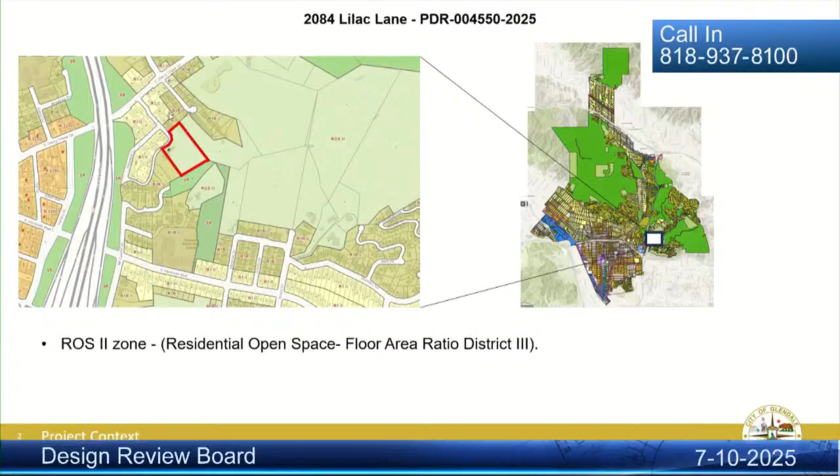I'll begin by giving a little context for the subject property. It's located south of Chevy Chase Drive, just east of the Glendale Freeway in the Chevy Chase neighborhood. Lilac Lane is a small curving street, and the subject property is quite large—almost 2.8 acres in size, with the vast majority of the site being vegetated, undeveloped, hillside sloped area, with a small flat pad area where the existing 1,300 square foot one-story home is located.

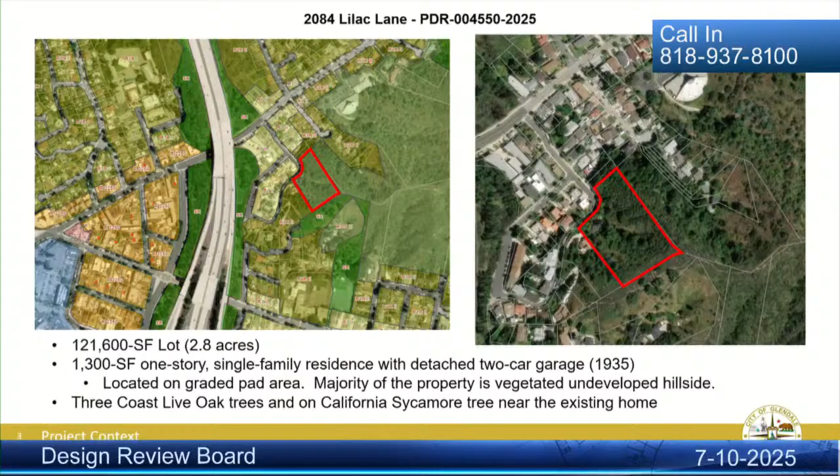The proposed project doesn't propose any new grading, essentially keeping the project to the existing pad area. In the near vicinity of the development there are 3 coast live oak trees and 2 California sycamore trees, which I'll describe a bit later in the report.

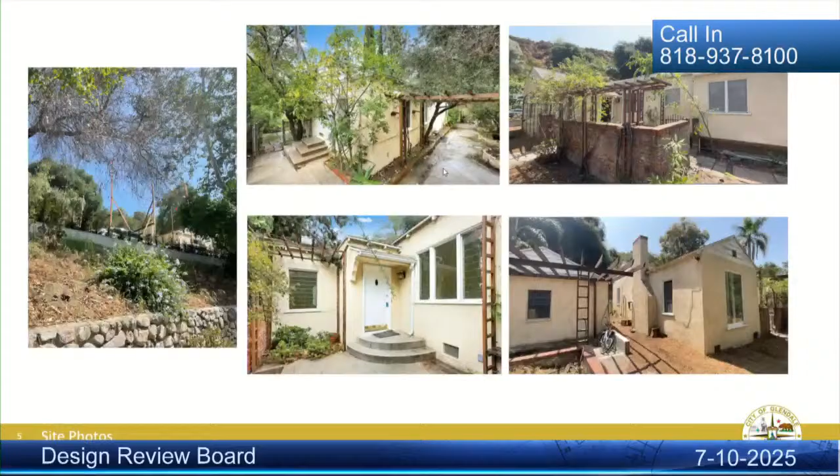These photos show some of the existing conditions: a simple, minimal, traditional home set up above Lilac Lane on this graded flat pad, with a considerable slope between the street where this photo was taken from. Here you can see the story pole installation that shows the outline of the second floor, for the board, staff, and the community's reference.

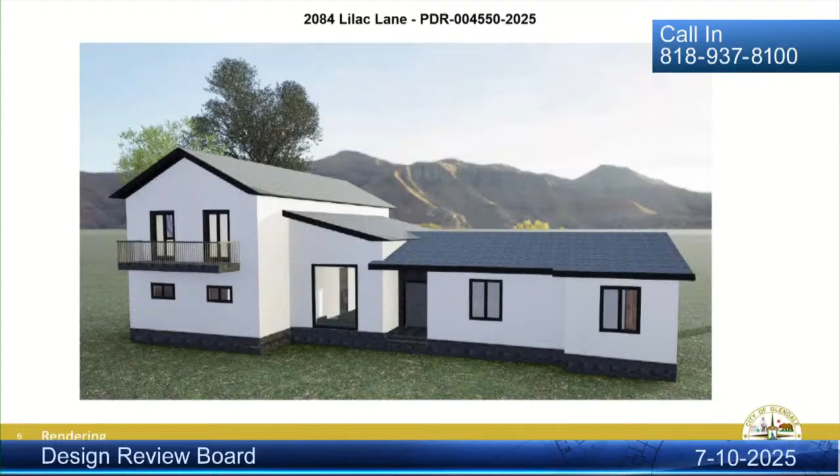Here's the rendering of the proposed project. You can see that the 2-story portion is set towards the east of the site, away from the nearest neighbor to the west on Lilac Lane, and generally maintains pretty simple traditional forms, with 2 open gables set perpendicular to one another and a shed roof area that provides a transition between the first floor and the second floor of the addition.

On the first floor, we have a recessed entry providing access to the living and kitchen area, 2 bedrooms, and a small library on the right-hand side once you enter—this is sort of an enlarged footprint of the existing 1-story home. On the east, left-hand side, we have the 2-car garage, 462 square feet, and a large playroom. Above it, a large office and a 3rd bedroom on the second floor with 2 balconies facing north and south.

Looking at the west elevation, the closest neighbor would be behind you if you were looking at the project from this vantage point. You can see how the project steps up from the 1-story portion to the 2-story portion as you move from west to east. And here you can see the garage and that 2-story portion of the home.

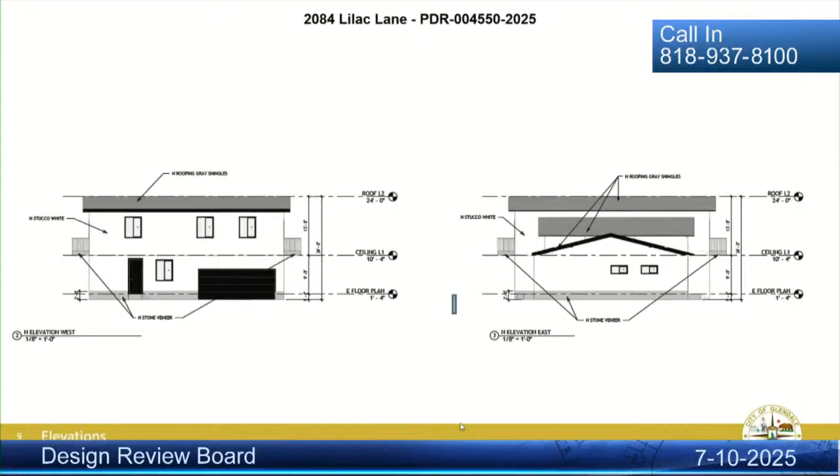As I noted, there are 5 protected indigenous trees located on the subject site. An indigenous tree report was prepared by the applicant and submitted for review by Public Works Urban Forestry, who concurred with the conclusions of the arborist report.

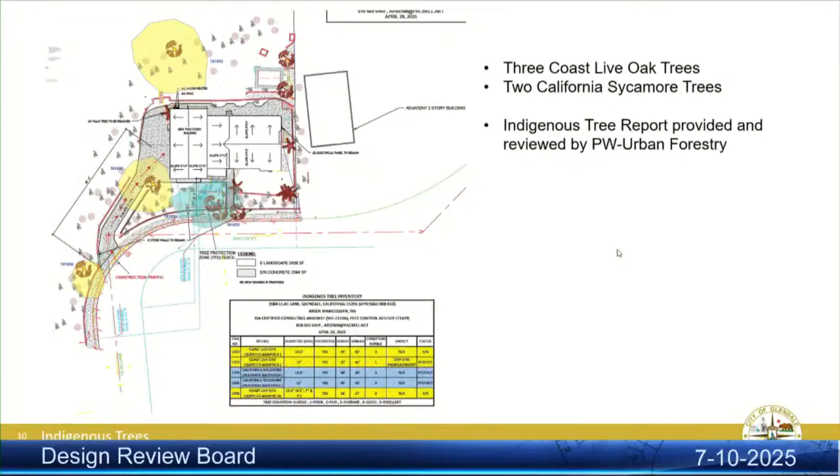I also wanted to point out a discrepancy between what was shown on the plans and the current conditions in the field. The subject site has low stone walls that are really in keeping with the rustic hillside character of the area, and they were shown as proposed to remain on the site plan. I think due to some sliding and some damage—and I can let the applicant speak to this—they increased the height of the wall and put stucco over it.

This doesn't necessarily comply with the zoning code nor with the design guidelines for hillside development, which look for a more natural look for retaining walls. So there's a condition of approval for the applicant to work with staff to bring that into compliance as this project moves forward, should it get approval from the design review board tonight.

Again, a relatively straightforward project. Staff spoke to the findings with respect to site planning, mass and scale, and design and detailing in the staff report. We recommend the following conditions of approval: to reduce the stucco wall adjacent to the driveway and restore it to its original condition, exposing the stone and maintaining its natural appearance. The driveway, which is shown to remain, based on staff's observation in the field, is damaged.

As a new home, we would like to see a new driveway with decorative materials appropriate to the design of the overall residence, and offer that as a condition of approval for the board's consideration. As you saw in the elevations and renderings, the home is a straightforward, simple design consistent with the style, but staff would encourage the applicant to consider a greater variety of exterior materials that could add interest to the home, and perhaps use an off-white or eggshell white in lieu of the crystal white proposed for the exterior color.

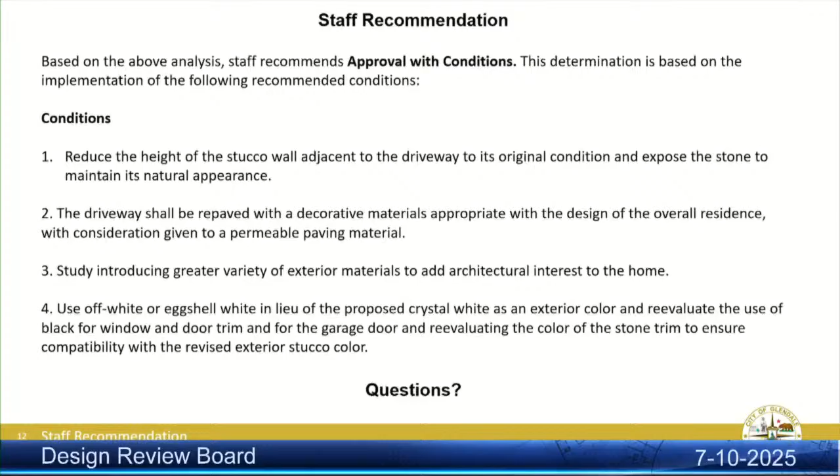With that being said, staff is supportive of the project with a recommendation of approval. I'd be happy to answer any questions of the board. The applicant and property owner are here. I did not receive any comment based on the public notice or the posting of the site, which was posted as required in the Glendale Municipal Code. That concludes my presentation.

Be happy to entertain any questions from the board. Thank you. The arborist report—did it require replacement of the oak tree, or just removal of the one in bad condition? Because the project plans called for maintenance of that tree, I'm not sure it spoke to that.

Let me take a closer look as the conversation goes on, and I'll see specifically what the tree report says in terms of the removal, and revisit Public Works comments to see if they would require a replacement of that tree that was in poor health.

Okay, I'll follow up with the applicant, but are you aware that they're going to be removing the entire roof as part of this and doing a new roof on everything? Yes, that's correct. The applicant did provide demolition calculations, which, when combining the exterior roof and wall areas, exceeded 50%, again requiring this project to be considered as a new home and come before the design review board.

Any other questions? Board Member Welsh, I do have the interdepartment comments and the Urban Forester's comments on my screen right now. They acknowledge that if that tree were to be removed, they did not require a replacement or replacement ratio. However, they did state that an indigenous tree ordinance permit would be required, which would include a protection plan for the existing trees on site or any work near it. So there were no replacement ratios or replacements, to answer your question.

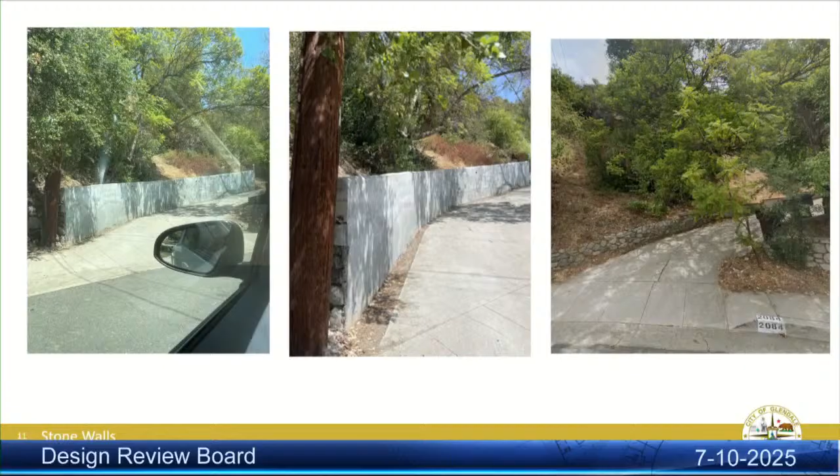So we're gonna bring it back to not the original look, because the original look was crumbling down. Those stones, I don't think they even have mortar, it's just stuck on top of each other, and they were falling down on the cars. That's why he decided to go ahead and reinforce it a little. But we can propose something nice, some nice wall, more natural looking, maybe with stamped concrete on top of it.

Yeah, concrete. Okay, sorry, just one more question. Do you mind bringing up the 3D image of the house?

I was curious, in terms of the roof forms, if that central volume, had you considered extending the roof all the way to the other roof rather than terminating it there and just having that be the roof of the entryway? I was just curious if you explored that option. We have not, but we could. I think if we do that, it's gonna be very bulky because we already have such a big volume for 2 stories, and next to it, it's a 1 story. Just adding to that 2 story is gonna create a bigger volume, and as far as the balance, it's gonna be off balanced to me personally.

And did you consider the lower roof form where the fascia overlaps the middle volume? Did you consider terminating it at that volume? Could be, yeah, could be. Doesn't... could be.

As a follow-up, did you consider just having that lower roof form continue all the way to meet the second-story volume, as opposed to this intermediate one? That's kind of a... because the upper roof is a gable, the lower is a gable, the other one is like a shed, so they're not necessarily in full alignment. And it also seemed like they have different slopes.

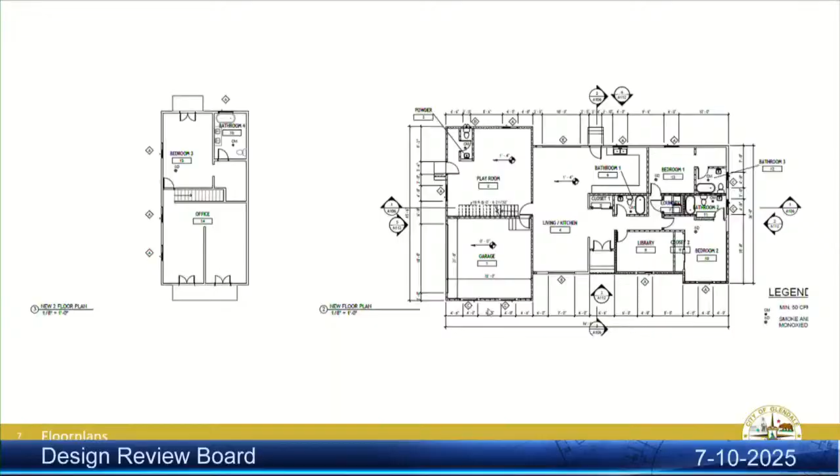Do they have different slopes? It should be the same slope, if I remember correctly. So the middle part is the living room, and the owner wants to have a higher ceiling in the living room. That's why we elevated it to give them that space. Because it's a smaller, narrower room, but they would have a higher ceiling. That was the idea behind it.

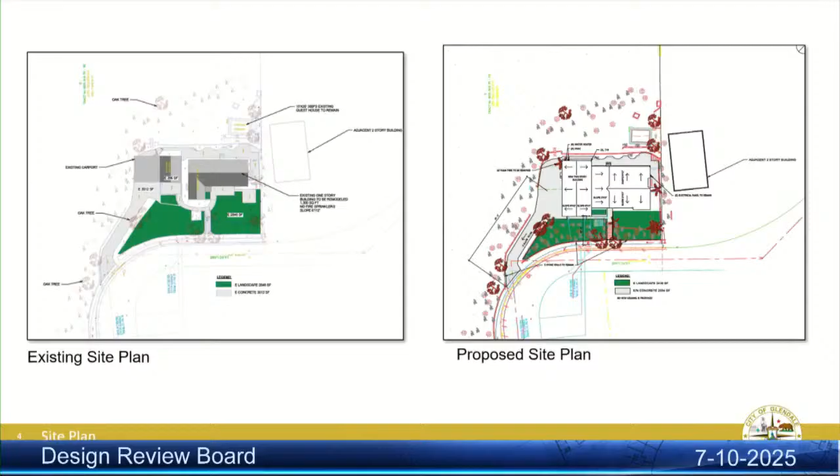You can see that on sheet A102, it calls out the roof pitches, the site plan, roof plan. So I saw that on A102, but that lists a 6-12. But if you reference page A105, it shows a 6-12 slope on the second story, 3-12 on the others, so they were not consistent on this page A102. So I'm just curious, are they the same or are they different on the different roof forms?

I have to double check that. I don't remember, tell us what your thinking is. The thinking is that it should be the same slope everywhere. Same slope, same everywhere, okay. Yes, that's the idea.

Mr. Halajian? Thank you, Mr. Chair. I was just curious about the driveway wall. Do you have any ideas, are you thinking more natural? I understand the cobblestones were falling into the driveway and they're not retaining, but are you considering doing like a split face CMU block wall? What are your ideas to comply with the hillside guidelines?

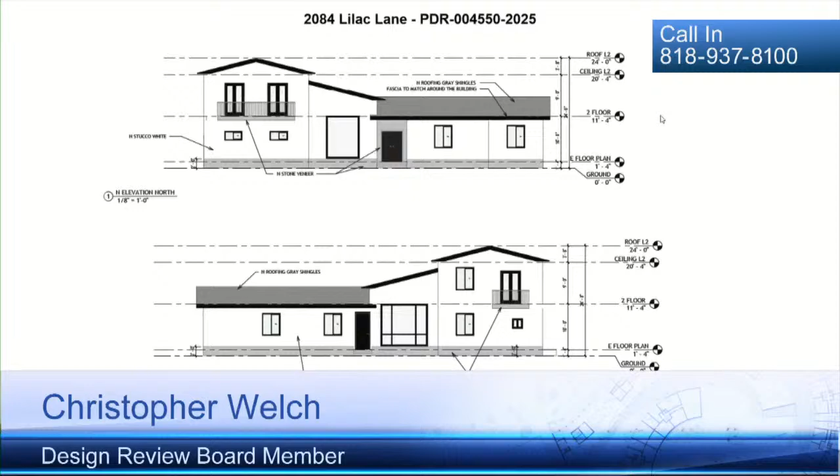Would the board agree that maybe the head of the windows and the door should share the same datum, so there's some consistency, and we can work with staff and the applicant on window sizes and fenestration pattern? I know there are some volumes where, for example, on the new south elevation, which would be at the bottom of the screen, the head of the windows don't really match up, and traditionally the head of the windows share that same datum line.

So there's some consistency as your eye pans across the elevation. We can work with that. And it could be that once they study the materials, that can be a solution as well—so the top of the material might align at that level, the level of the larger window. I think those could go hand in hand. But for me, I can appreciate wanting a tall window for the interior in a large volume.

So I concur. I just think that from a massing perspective, how it dominates the facade was a little much. But again, I don't feel that strongly about it unless others agree. I think that's a consideration to study—rebalancing the fenestration and potentially aligning headers so they're a little more consistent. I think that would be appropriate wording for consideration.

They could even raise the windows on the right to meet it, or vice versa. I like how that might be worded, with the ceiling height considered. Yeah, I do appreciate your comment, Mr. Chair, and I would support the consideration of restudying the windows.

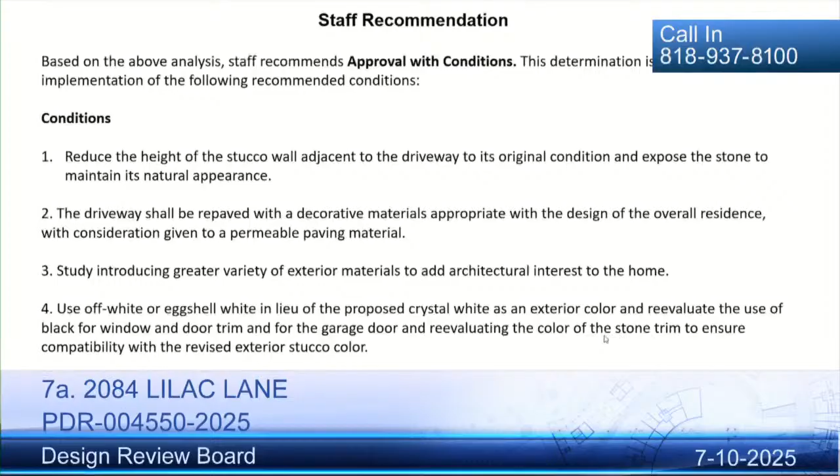May I ask the board for some guidance on condition number 3, which is studying a greater variety of exterior materials and adding architectural interest? We'd be glad to work with the applicant, but if the board could share some guidance so that when we work with them... I do see some things we can add in the volume, maybe the front entry. For example, if they were to use a cladding material there, maybe stone.

Just in that recessed entryway area? The entry is clad, but it's a little hard to see because it's recessed into the volume, which is what the guidelines want. I'm just saying we're happy to always work with them, but if you're asking for more variety of materials, maybe you can offer more guidance, if you guys want to offer it. That's all I'm asking.

Sure, yeah, I appreciate that. My suggestion would be to consider adding trims around the windows rather than just straight, smooth stucco all over. That would add an architectural element and maybe balance the overall look, but I'm open for suggestions. Actually, I personally like the modernness of the window detailing, but yeah, I'm open.

One thing I was thinking was, whatever material is clad on the entry, maybe at that base where it's shaded, is that also clad already? That's correct, yeah, on the entry. But on the base of the entire building, there's shading in the first maybe 24 inches or so. Is that stone? That's the stone veneer, wainscoting around the base of the building. Gotcha. I personally didn't feel strongly about that detail.

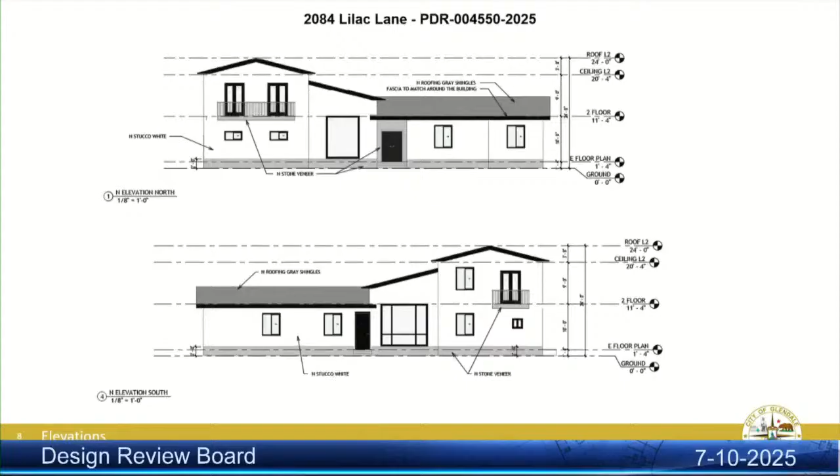I didn't either. It's a modest project and it sits way above the street, so it's not super visible from the street below, so I didn't feel that strongly about it. Like you, I kind of like a more simplified plan there. I understand what you're going for, and I'm okay to leave the condition in there for you to work with the applicant on that. But from a visual, design, and detailing perspective, I don't see an absolute need to do that.

So I'm inclined to just leave it as is. You can work with them, and if you can reach a consensus, great. If not, I don't think any of us have objections to it as is. If it stays as is, I'd be okay, especially knowing the entryway is clad and the base is clad. I think it's nice. But I do agree with the color for our design guidelines, like we were saying.

That does definitely need to be addressed for the stucco color. For the window color, I don't have an objection to black windows myself. Very good, I hear you loud and clear. Thanks for that feedback.

Okay, so with the staff's conditions, maybe we can strike out the black, if the board is okay with that, with the added condition regarding resolving the roof form and providing a better transition between the first and second level, and considering the fenestration pattern, improving the proportions and placement on the elevations. Do we have a motion?

I motion to approve this with the conditions stated. Thank you. I'll second that. Thank you. Okay, this will be roll call.

Board Member Halajian, yes. Board Member Lockhart, yes. And Chair Pro Tem Welch, yes. Motion carries 3-0. Thank you.